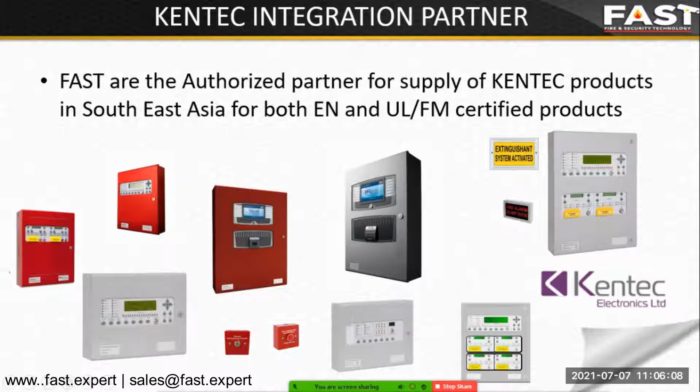And you can see some of the products there, some releasing panels, the Taktis panel, which is the up to 16 loop main fire control panel. Some smaller panels, some releasing panels, and some peripherals that are used, such as the LED signs, abort switches and maintenance switches. So we add value to these products. Quite recently we've had a few customers change from another type of panel. They like the Kentec panel, they like the Taktis panel.

At the moment we can't travel. If we could, we would go to the country, we would sit with the customer for a day, and they would be fully conversant with how that product works. At the moment, that doesn't happen. So over the last 12 months or so, we've been sending panels out and doing remote training, and that has proved to be very successful. As long as the panel is in the hands of the customer, we can link to the panel, use technology such as TeamViewer and even Zoom to control a PC on site, and go through the programming and the various setup routines for each individual panel.

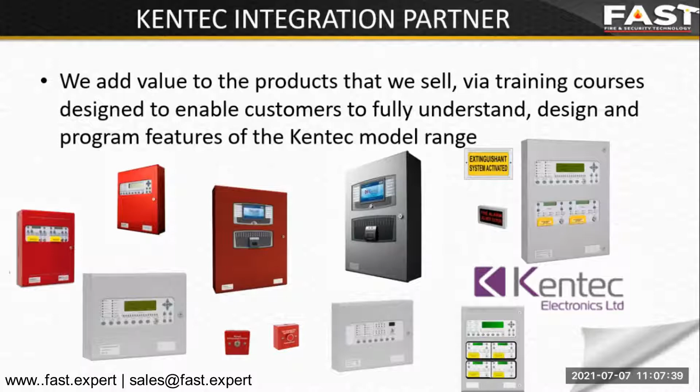Some panels don't need any setup. It's very simple. Conventional panels, generally, people work it out. But for addressable panels, especially the Taktis being a new panel, as long as you've got the software and an internet connection, not only can we train you on it, but we can support you when you get to site and you've forgotten what to do. You only need a mobile phone these days and a laptop, and we can log into your PC, have a look at what's going on, and you soon pick it up. So we add value to all these products.

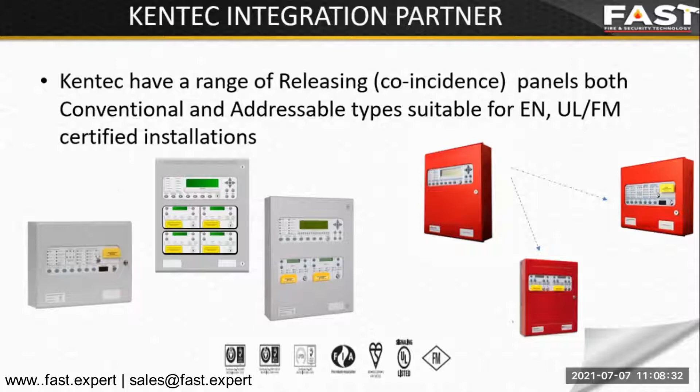Kentec have a huge range of releasing panels, or what's known as coincidence panels. We'll be taking a particular look at one of these today, where we're doing the integration to a small system and a large system using these releasing panels. So Kentec, one of our core businesses, we support it around the region, not only for new sales, but also for spare parts. Spare parts for existing models are quite easy, and for older models also quite easy, or there'll be an alternative part. Quite recently we've had customers phone up looking for a power supply that hasn't existed for 5 years. But liaising with the tech guys at Kentec, we offer one that's pretty much the same size and will replace the one that's gone faulty on site after many years of service.

Another integration partner is AF-X, which is an aerosol-based suppression system. We're the distribution channel for AF-X within Southeast Asia. From our base here in Singapore, it's very easy to service the Southeast Asia region. When travel does come back, and before the pandemic struck, I spend probably 3 weeks out of 5 traveling around to each country. So it's very easy to make contact with people, to show people firsthand what these products look like.

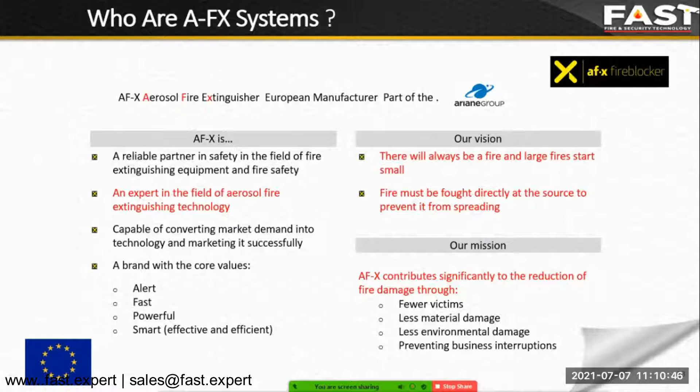When you send a rocket into space, there could be a fire when it's in orbit. So you can't send up pressurized gas cylinders because they become part of the problem. So if you go back 30, almost 40 years, you can see that a lot of these space agencies were looking at alternatives. And the alternative that AF-X developed is actually used by the Ariane group when they send up spaceships. It's pretty good.

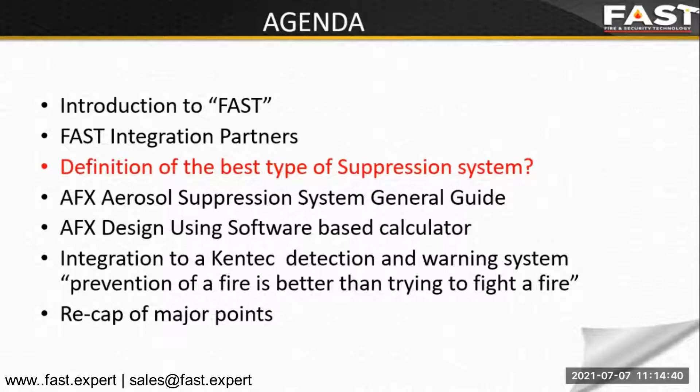People say to me, they phone up, what is the best type of suppression system, John? What would you recommend? And I guess it's a fair question, but it all depends on the application. What is the best type of suppression system? And suppression systems, detection, protection, prevention, they're all different terminologies. And very few people actually know what they mean.

A fire detection system, is that only to detect fire? Well, what's a fire protection system? We use these terms to generally cover some kind of fire system, some kind of fire alarm system. So what we do is we approach it slightly differently. We integrate systems together and we offer these systems to people. Even if they're phoning up and they're looking for a fire system, we sit with them and we say, okay, what are you actually trying to achieve? So what we try to achieve is protection of their business continuity.

And I would urge everybody on the call, when you sit down with a customer, they may be asking you for one of these systems, but you need to know what the implication of a fire in their premises is. Everyone will say, don't worry, we're insured. And that's a fair point. But the insurance industry actually have a little saying, which you'll find on various websites, some as high as 80%, some as low as 50%, but 70% of businesses that have a major fire event will cease trading within 12 months.

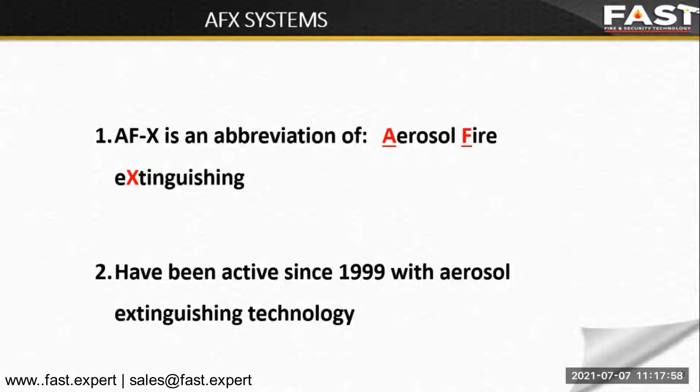So AF-X. It's just an acronym for aerosol fire extinguishing. They have been active since the end of the last century, since 1999. And it's been born out of the fact that, as I mentioned earlier on, when these rockets go into space, they can catch fire. There have been many incidences of fires, and you can't put them out with gas. Well, you could, but the gas itself, being a pressurized container in space, is actually a problem. So a lot of the products have actually been developed using technology that was based around the manufacturing and the launching of spaceships.

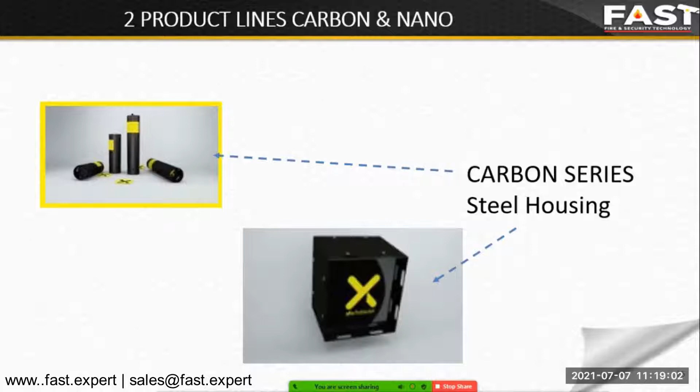So 2 product lines, quite simple: Carbon series and Nano series. Outwardly they look the same. One is made from steel housing, the other is made from stainless steel housing, which you'll understand as we go through. There is slightly more difference than that, but the housings just look slightly different. A black painted steel housing and a stainless steel housing.

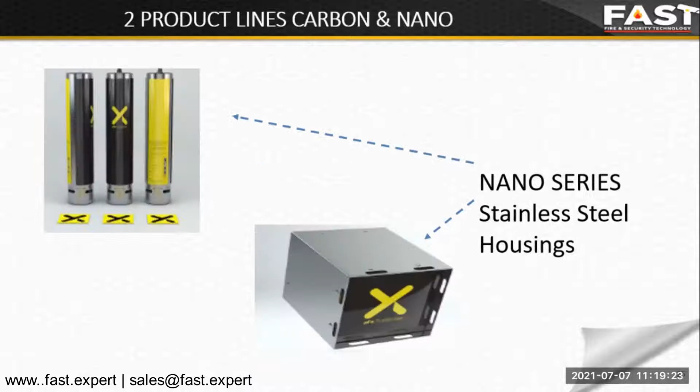And you can probably see one behind me on the bench there. So what's the difference? If you think of Carbon as being the general workhorse of AF-X, when it actually ignites, when it's actually triggered, microscopic aerosol particles are released into the room, and using convection, it is drawn to the seat of the fire. It interferes with the fire itself and puts the fire out.

It also coats the fire to stop it from reigniting, hence the name fire blocker. So not only does it put the fire out, but it will then prevent the fire from reigniting. So this is the general run-of-the-mill workhorse for pretty much the aerosol that we would design. It's great. The Nano is slightly different.

So Nano uses very small nano-type particles. And these particles make it ideal for tackling fires where you've got, let's say, lithium-ion battery storage, which is extremely hard to put out. Not only is it hard to extinguish, but it's hard to stop it reigniting. So that was designed and developed specifically for that type of application.

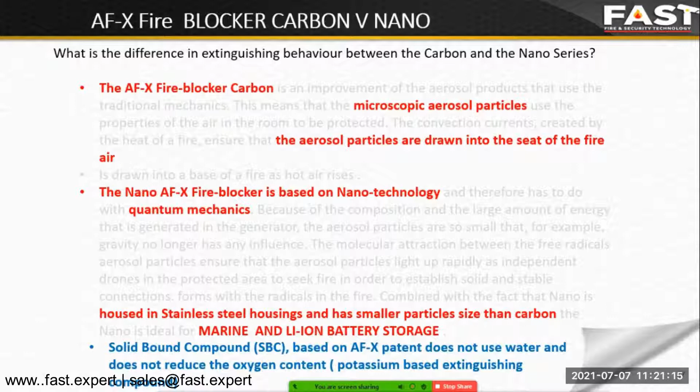As it's got a stainless steel housing, it's also suitable for offshore or marine type applications, or applications where there's a corrosive environment. So two different types of systems, both using what they call a solid bound compound. It has an AF-X patent on it, but it's actually a potassium-based extinguishing compound. No water, no reduction of oxygen content. So quite a nice technology to look at.

So what we've done as a distributor is we've looked at the shipping. A lot of these products come unstuck when you try to ship them to someone. So we've shipped the units from Europe to Singapore, no problem with that, and we've shipped them back out to countries within Southeast Asia. And what we found is that the Carbon series, which is the workhorse of most of our projects, is not classed as a dangerous good.

We have the manufacturer's data sheet. We've asked TNT and FedEx, how would you class these? And they said, don't worry, they're not DG. Great. The Nano is DG, as is the Stat-X and the FirePro and all the other competitors. So it just depends on your application. If your application is one of the 80% of applications that we come across, Carbon, no problem. Bring it in, standard shipping rates apply.

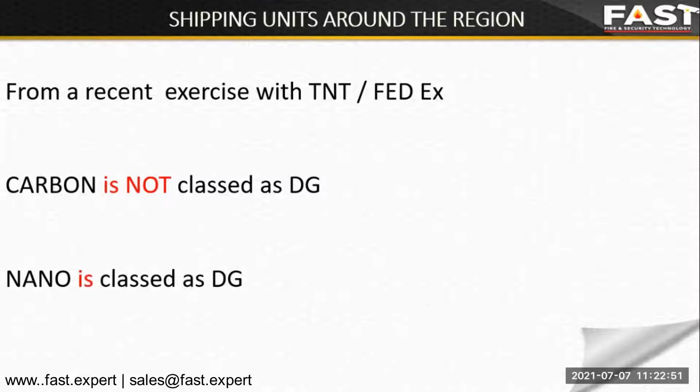There's no special import regulations required for it at all. So that's great. If it's Nano, then obviously there needs to be some kind of shipping company. And we found that there are named companies that will ship them in on your behalf. You pay for it, unfortunately. But you can get the Nano in if there's a specific application that you need. Probably for marine, maybe server type rooms, or lithium-ion battery stores.

So a lot of these systems, including AF-X, need to have some kind of calculator to be able to say what size, what model do I need, John, and how many do I need? So my answer is, I don't know. You've got to send me some information. So there are generally two types of systems. They're all electrically triggered. It doesn't matter whether it's a thermally detected device being thermally triggered, or an electrically triggered device. They're all electrical. It just depends how you design the system and what is the area being covered.

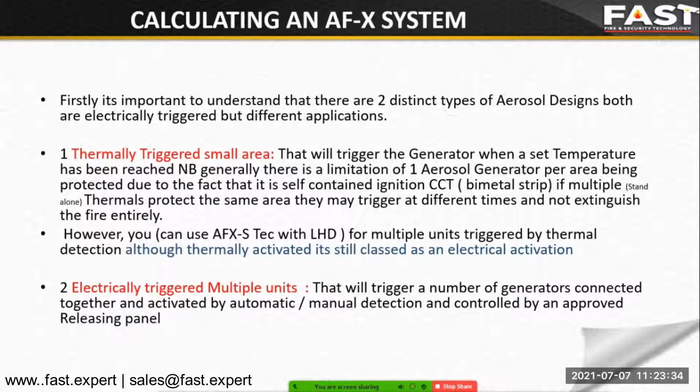So let's have a look at the components. Here's our components. There's some cylindrical units, there's some larger square units, and there's two different ranges. So I need to understand what is my job, what is the opportunity that I'm looking at. And there's a lot more components. There are brackets, stainless steel brackets, signs, which everyone forgets, but you do need signs.

All of the AF-X generators are very simple to connect. You connect to a connector hood. So if it's an electrical system, you wire into this from your control panel and you simply plug this into the generator. Simple. If you want to test the circuit, you simply unplug from the generator and plug in a test lamp. And you do your test and all these little lights light up to say it's working, no problem.

That's great. Each of the AF-X units has a specific resistance. And if that resistance goes up, it means there's something wrong with the generator. So it's pretty much a fail-safe type system.

On small systems where you might be protecting, say, a switch, we would use perhaps a bimetal activator. This little bimetal switch activator will plug. So this is just a plug, plugs into the top of the generator and sits in a cupboard, sits in a switch cabinet. Very, very simple. And it will activate when it reaches 65 degrees. So if it's switch cabinets, generally speaking, you need maybe 1 or maybe 2 units within that.

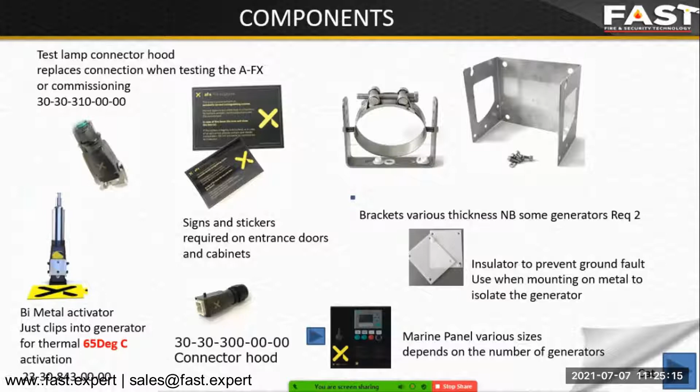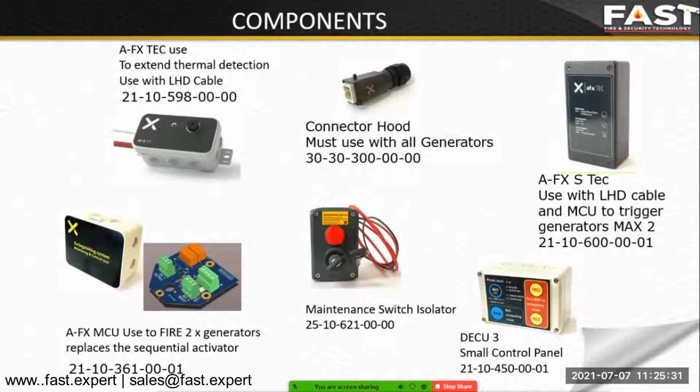Thermal activator is quite easy to use, quite easy to design, and works quite easy. So lots of components. There's even more components, some isolator switches, a few small panels allowing us to be able to connect up multiple thermal units using linear heat cable. So very, very simple. And if anybody wants more information on this, we have a complete presentation on AF-X.

Okay, so a customer's phoned up and he's got a switch room and he's got half a dozen switches in there, and he wants to protect the switches because the switches are running conveyor belts and lighting and all kinds of circuits within the building. So we need to know a little bit of information: what class of fire, the size of the area being protected, length, depth, height, and whether it's going to be a small area or large area, whether we're going to have one unit or multiple units linked together.

So we need to know what class of fire it is. So we're told that this is maybe a class A fire, so we can treat it as class A. The different classes are quite important, A, B, C, D. A and B, no issues with this. It's chemical fires, it's insulation burning, paper, wood, cloth, all those types of things. Class C would be an electrical equipment that has caught fire but is still energized. You cannot fight that fire using any aerosol.

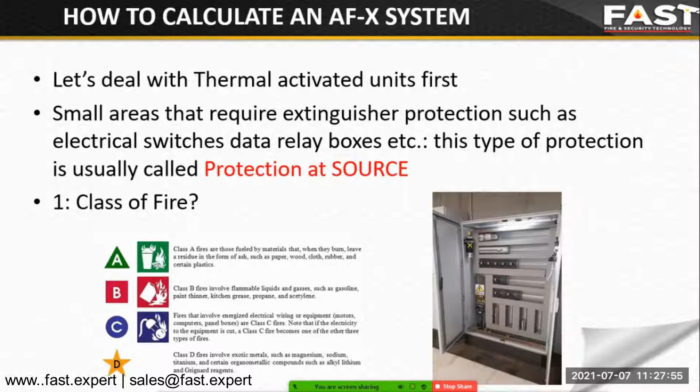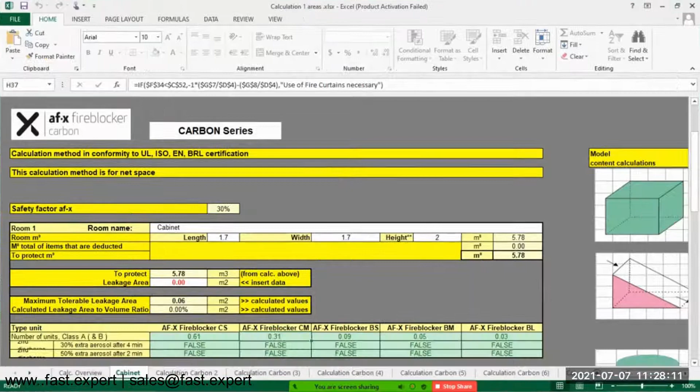So here's our very small example. So what have we got? We've got a cabinet. So we do have a little calculator, which I'll show you. Let's make it full screen. So I've got a calculator, and I filled in some information here prior to our meeting. This calculator can actually calculate 7 different areas, and you can run it as many times as you want. So if this was one area of 7 areas or on its own, it doesn't matter.

So I just put in a room name, cabinet, switch room, whatever it is. Length, width, and height of the room. And once I enter these dimensions, that's all I have to do. Now, what it will actually do is bring me up this little red bar down here. So under each of these fire blocker models, you can see the C, the cylindrical ones, and the other ones which are actually the large square unit. You can actually see some figures.

But don't forget, this is a cabinet. You can't put 2 fire blockers or 2 aerosols that are thermally triggered inside the same cabinet. The reason for that is one won't do the job. So what we do is one goes off because the thermal trigger says, I've reached my temperature. What it then does is it actually quenches the fire, brings the temperature down, and then stops extinguishing.

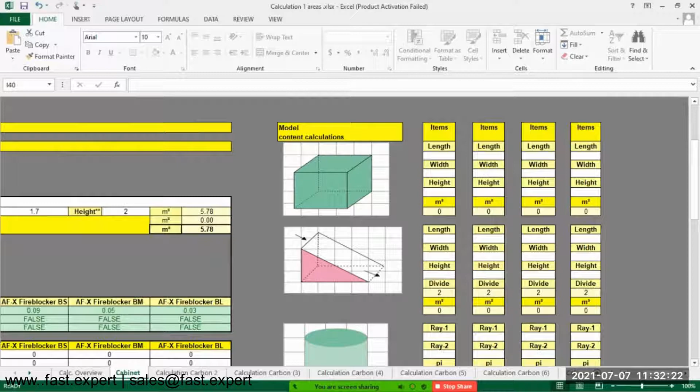Most areas that you're protecting are not actually empty. They've got something inside. So what we've got over on the right-hand side here is the ability to be able to put a shape in, maybe it's a small motor room on a boat. So the actual engine itself takes up some space. So we can actually put the size that the engine will take up in cubic meters into the calculation, which then will reduce the number of fire blockers we need.

So in the case of needing 1.36 fire blockers, I wonder how I can get away with using 1. Oh, there's a big engine in the middle. So I just put the size of the engine in, and that size of the engine is deducted from the space that I'm actually going to put the extinguishant in, and bingo, everything is okay. I can now use 1.

So the calculator is very flexible, and it does allow you to put in objects that are in the room and also leakage that could occur. And if it's leakage, then it will tell you, yes, you need to be able to put more, a bigger generator in, and you need to be able to put a secondary one in.

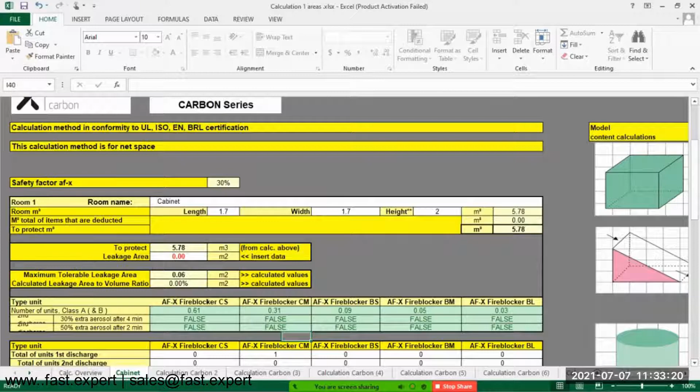So you might have a large fire blocker that initially goes off, and then you might need to top up the area after 3 or 4 minutes. So that would draw you to the fact that you need a control panel with a timer in it, i.e. a Kentec panel. Okay, so that's pretty simple.

What we can also do is produce a report, and the report just simply gives us a rundown on all the information that we put in. So we've calculated the best generator that we need. We can then select the equipment that we require. So in this small example, here's a generator, a couple of brackets, thermal trigger, clip it on top, a sign on the outside of the cabinet, which is a sticker, and a sign on the inside. That's just regulations.

Not only can we put this together in a few minutes, but you actually don't need to drill the cabinet because we supply a magnet on the back. So you assemble this on the bench, attach it to the bracket, and stick it in using the magnets. How simple could that be?

That generally is a simple one-to-one small cabinet, small area with one thermally triggered device in it. But not all systems are like that. This one is, and works very well. So that's great, no problems at all.

With all aerosols, it's important to understand that you need to extract or clean up the area after it's discharged. Generally speaking, it will discharge and fill this area. It will put the fire out if there was one there, and block the fire from starting for a 10-minute period. You've got literally 50 minutes to get all of these airborne particles, which look like smoke, out of that area.

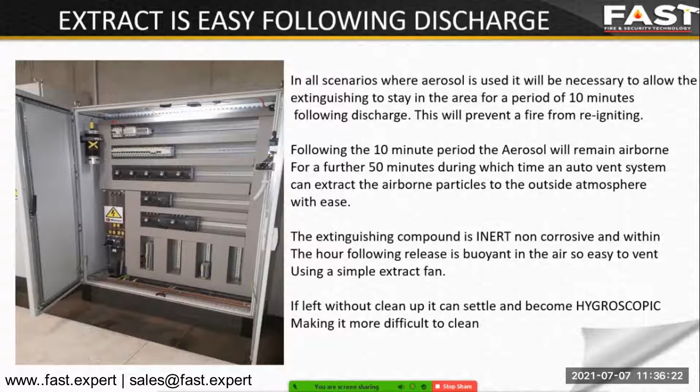Just a warning that we design systems - we even design the size of fan that you need. Very simple, very easy to install.

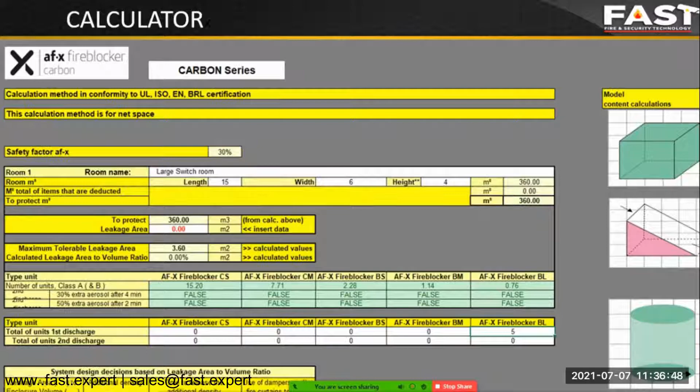Let's look at a large switch room - total flooding, 15 by 6 by 4 meters high. I won't run the calculator, but it looks like this: 15 by 6 by 4, and it's telling me I need 5 of the large fire blockers. So now I've got a large system in here, and I'll have just 0.76 over, so that's good. It doesn't really matter, a bit can leak out.

So that's good - here's my equipment, my carbon fire blocker, BL fire blocker. And obviously we need now an electrical option, so we need some panels, some detection, et cetera. Let's have a look how that would look as a system.

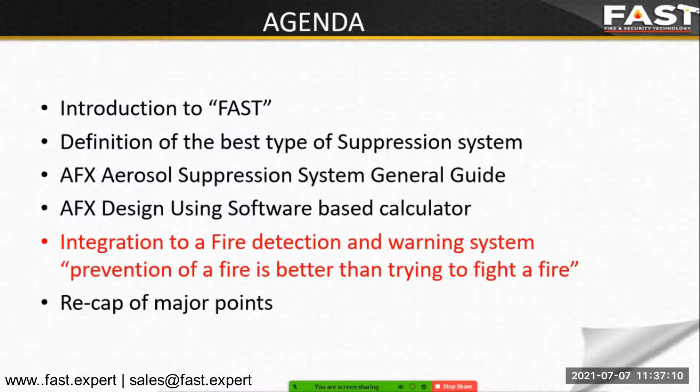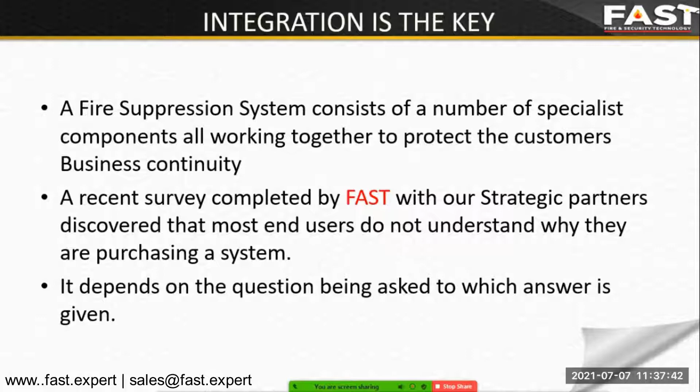By integrating that into a full system using detection, using a releasing panel, using warning devices, we'll see what that actually looks like. We actually ask customers, end users, system integrators and solution providers what is it you're trying to do. It might seem obvious - we want to protect this, we want to make sure there's no fire - but they're not actually precise in what they're asking. A lot of questions actually seem the same.

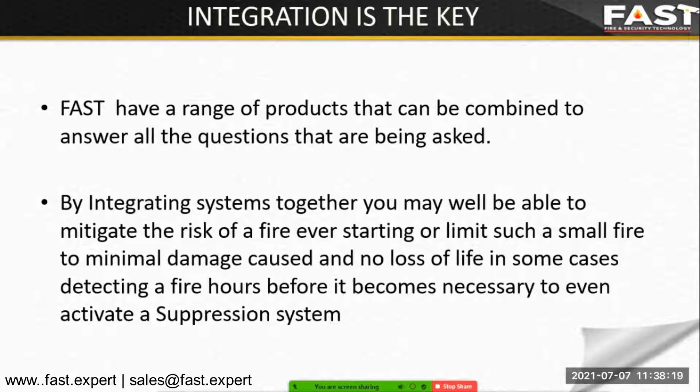Do you want to detect a fire? Well, of course we do. We want to protect our employees, but it all depends on what question you ask people. If you actually say to someone, do you want to prevent a fire, they'll say yes to that. If you say, do you want to extinguish the fire if it occurs, yes, that's what I want too. So it all depends what question you actually ask a customer. I guess the question we should be asking is: do you want to prevent a fire? By integrating the products you saw earlier on, we can actually do that.

So let's have a look at the standard scenario. The standard scenario would be the panel. Here's our Kentec panel, some LED signs - I'm sure everyone's aware of what these are. Bells, inside and outside sounders, beacons - these are all to give you different stages of alarms.

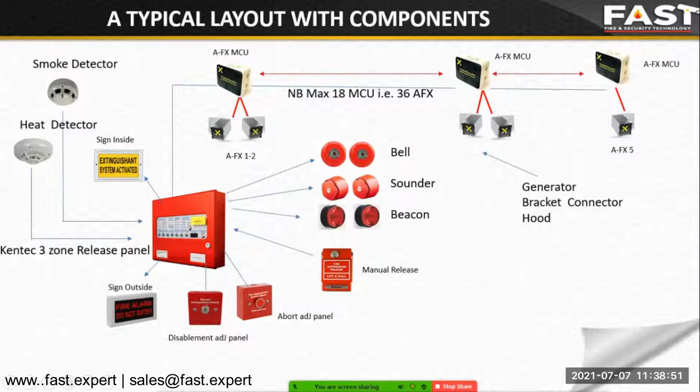Here is our trigger for the AF-X. So the AF-X is there, you can see the 5 units, and usually 2 different types of detectors. Quite often I go to sites and there's 2 smoke detectors - okay, that's fine. So it all depends on what question you ask.

So let's assume the customer has said, I want all those things, John. I want you to give me everything, yeah? I want to try and prevent the fire. I want to extinguish it if it does happen. And obviously I want to detect it and protect it. They actually want to protect their business continuity - that's actually what they want to do.

So here's a scenario I've seen fairly recently. The site is unmanned. It's got a basement switch room, and the basement switch room is a bit of a mess, to be honest with you. I don't know why, but switch rooms tend to get very messy. And that switch room is running the entire manufacturing plant, so that's critical to the customer's business, because if the switch room is out of action, so is the rest of the plant. So the customer said yes to all our questions.

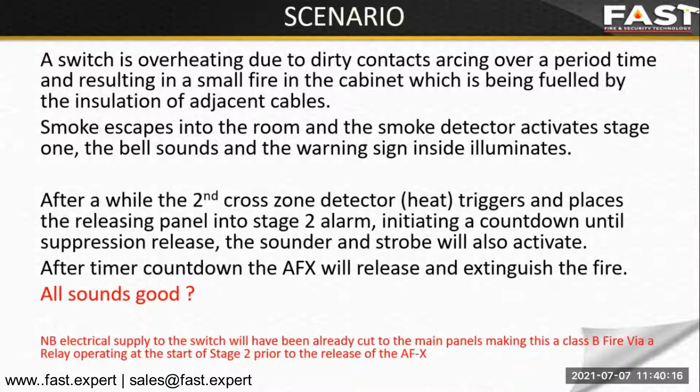So in our first scenario, where we've got bells and sounders and a couple of detectors, the switch overheats, smoke escapes into the room, the smoke detector activates, stage 1 goes off, the bell sounds, the warning signs start to illuminate. After a while, the second detector goes off, placing the releasing panel into second stage alarm, initiates the countdown, and the AF-X releases. Great, no problem at all. Okay, so that's the typical type of scenario that is expected and happens on site.

Okay, so let's have a look. Do you want to detect the fire? Well, we did. Do you want to protect the employees? Well, I guess we did, yeah. And we can extinguish the fire, yeah. We didn't prevent the fire from happening, and it's arguable whether we minimize the damage caused by the fire.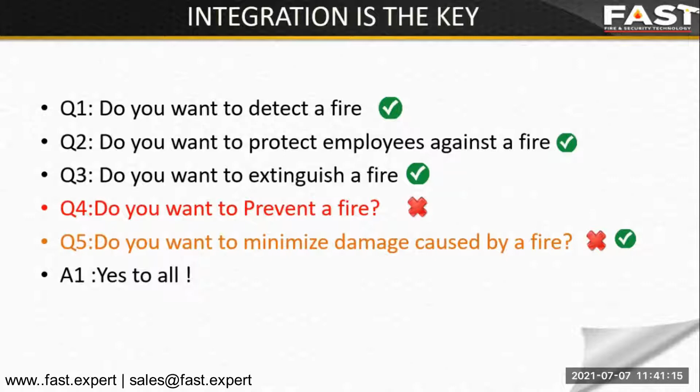A small fire can put that customer out of action for 2-3 weeks. Yes, it's a switch - the switch is irrelevant, it's a few hundred dollars worth of switch. But some of the downtime figures that customers quote to me run into tens of thousands, if not hundreds of thousands of dollars an hour, because they can't produce the product that they're producing. One example given to me some time ago was the downtime for a production line in Thailand making Ford trucks - $5 million an hour. And that $5 million an hour can be because a switch was burnt out unexpectedly that ran a production line and stopped it.

So just looking at those there, we've probably got a couple of crosses and some ticks. Okay, that's reasonable - is that all we can expect? No, we can do so much better, we really can. And I'll show you how, I really can.

Not only can we do so much better, but I recently attended a commissioning of exactly that type of project, and the system integrator was handing the system over to the client. This is exactly what he said: okay, so when the bell sounds, you're in stage 1 - this means you've got to investigate and see what detector zone is activated. And then if you get a sounder and a strobe and a bell, you should leave the building.

No one's going to remember that. They're not going to remember it. They won't even remember - they'll hear a bell, think it's a fire alarm, and leave the premises. So I think it's very confusing, and nobody understands. They're sitting there when everything goes off because they don't understand what phase of the fire they're actually in.

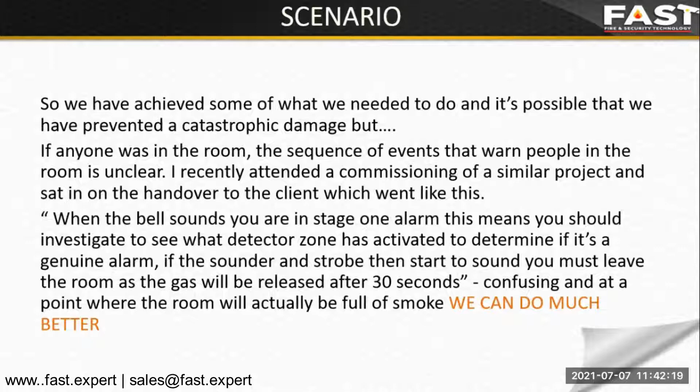So now our little schematic looks slightly different. Yes, our Kentec panel here - this panel, we're selling 400 or 500 of these a year. It's very, very popular. It needs absolutely no installation training - we'll give it to you, but it's very simple. It's a conventional panel. There are addressable panels and there are multi-zone panels, but for our little scenario, single zone, single area, multi-zone panel. And we've still got our smoke detector.

But what I've added in now is I've added in Fire Cryer. Well, those look nice. They have got strobes on the front of them. And I've added in an ASD, an aspirating smoke detection system, our Vesda. So that's even better. Not only have I added the Vesda in, but I've actually added in a GSM communicator. This will work anywhere. GSM, SMS communicator works in any region. You just put a SIM card in and it works. So we can actually integrate this system in a couple of minutes into a GSM communicator. So very, very simple to do.

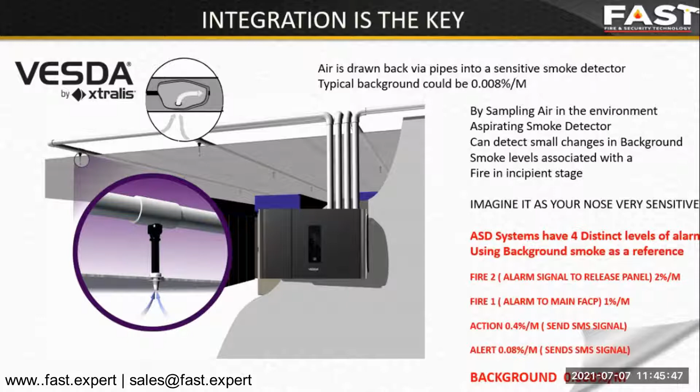So what we can do with Vesda is we can say, right, the normal background is 0.008 or whatever it is. 10 times above there, we will actually have a relay that clicks over and says the smoke level has risen 10 times. 5 times above that, we'll have another signal to say that it's risen a little bit more. None of these signals are actually a fire, but they could be a fire starting, okay? So we'll integrate that into our project.

And you can actually see here, this is where Vesda works. Here's our alert signal. When the smoke level has risen 10 times, 11 times, 12 times, whatever you want to set it as, above the normal operating background level of smoke, it will send an alert to the security guard, the maintenance manager, the owner, and anyone else. Multiple SMS go out. And what it does is it brings people into this room. So you're bringing people to an area where in a few minutes, a few hours, or even a few days, you could end up with this scenario. If you don't, you'll just get to this scenario later on.

So hang on a second, we can actually send somebody there the day before the fire occurs? Yes, you can. Has it ever happened? Yes, it has. In fact, that's what Vesda is for. Most people only ever link up Fire 1 on Vesda. This is pointless. You're missing the point with Vesda. You're missing the point with an aspirating system. This is what it's designed to do.

I go in there, I use my Vesda, my nose. What's that burning? I don't know. I'm the security guard. I'm just told to come down here and take a look. So I'm having a look. I better call someone in. So at that point, you're bringing experts to an area that can say, yeah, you're right, I can smell something. You can use a thermal thermometer. Every switch in a switch room has an operating temperature. It doesn't vary. It's always the same.

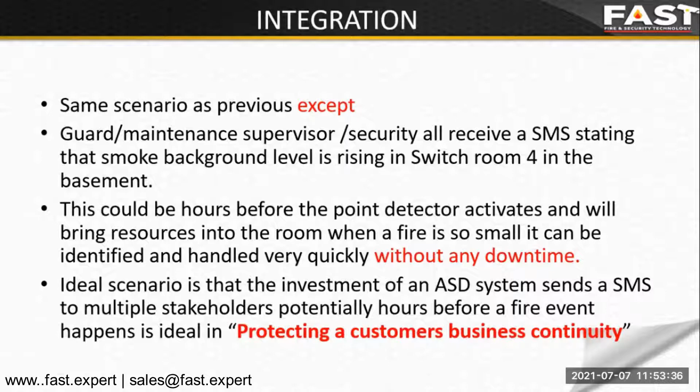And what you're doing now with the addition of a few little devices is making it easier if the alarm does go off, but you're actually getting to a point where the alarm will actually not go off. There's no bells ringing, just an SMS bleeping on your phone. So you're actually protecting the customer's business continuity.

Let's assume nobody responds, or they respond and can't find anything. Let's leave it. It doesn't matter. It's okay. We're so early in the fire cycle that we'll just leave it, yeah? Because when VESDA reaches action, we can send a more urgent message to the smart device or the mobile phone. Please go and check. Go down there and now check it, yeah?

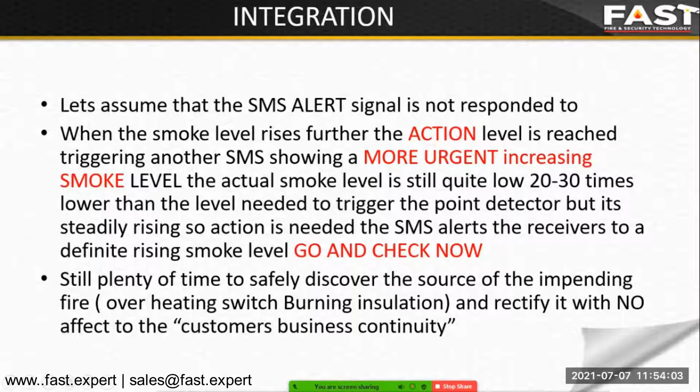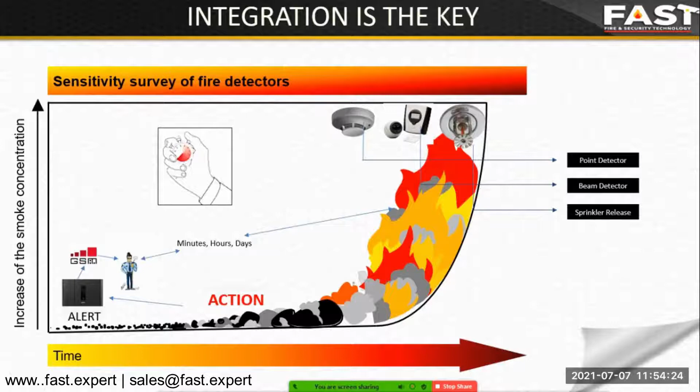And here you can see action. So this is 10 times above the background. This could be 5 times above alert. And we're still hours before we get to this bit where the fire is actually going to occur. That's okay. That's a good scenario, yeah? So now when we go in and we use our inbuilt VESDA nose, we can smell something. And we do now take it seriously, yeah?

So that's good. If it's a totally unmanned site and nobody's reached there in time, then of course, VESDA will reach fire 2. Shortly afterwards, the point detector will activate, or the heat detector, or whatever second zone you have. And what it will actually do is release the extinguishant into the room and put the fire out, yeah? But that's not what we're trying to achieve. We're trying to achieve a point where that doesn't happen, yeah?

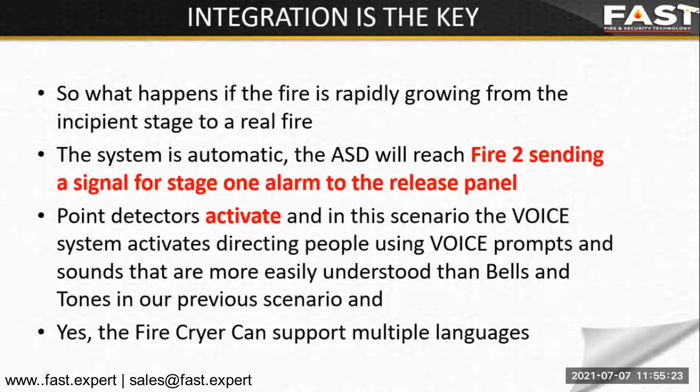So a lot of people say, can we use different languages for Fire Cryer? Yes, you can. So we can record any message. There are limits to the message; you don't want a 20-second long message. So it's generally kept to a short thing. And generally speaking, it's in dual language, so it's in the language of the country plus English. Or it could be just in the language of the country or just English.

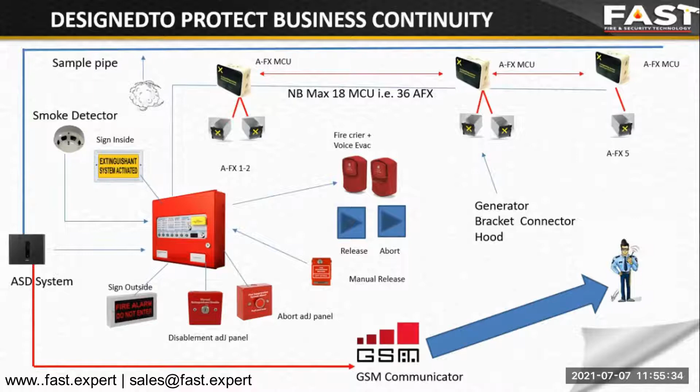Okay, so that's good. This design here is designed to protect the business continuity of the customer so that we can tick that last box. We've said everything. We can do it all. We can even, if the customer wants it, integrate into a CCTV camera and send you an email, not just an SMS. We can send an SMS, an email, and even a CCTV picture so you can actually see what's happening in the room, and all you'll see is a little bit of background smoke that's triggered the VESDA, if that. So we can do that integration.

And this guard here can actually just say, oh, I see. And he can actually see on his smartphone within a few seconds of that VESDA telling him: VESDA basement 4, here's the alert, I can have a look. Okay, I better get down there. There's no fire at the moment, great. So we can go down there and follow the procedure that the customer has in place.

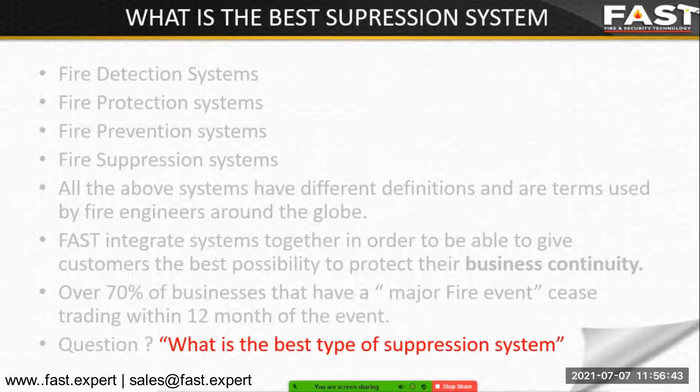Okay, so I'm going to return to my little screen earlier on of what is the best type of suppression system. And you'll all know the answer to this. It's one that never actually needs to be used. So we put all these systems in, and there's a system after the suppression system, which is called insurance, yeah?

But we spoke about insurance at the beginning. Insurance is fine, I've got all my stock. I've got my $1 million worth of stock that was paid 6 months later than the fire. Now I've got the money, I can rebuild another warehouse.

But by the time your warehouse or your production facility is up and running, your business is gone because all your customers have moved on. Same for us, you know, we've got a warehouse full of equipment. Yeah, it's protected by VESDA. It links to me. I can come and actually have a look, and I can alert the building security to come in and have a look.

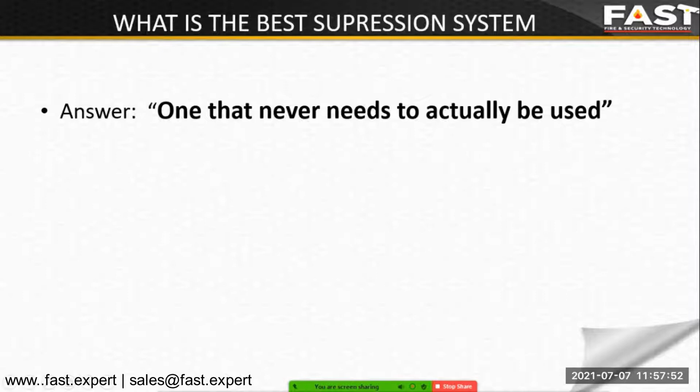But if we lost it, we'd be struggling because our products are there. We can't get products tomorrow. The insurance will pay up, but probably 4 or 5 months down the line. So yes, it's a little bit of a flippant answer, but the answer of what the best suppression system is, is one that never actually needs to be used. There's a little video here showing you how effective.

So I think you'll agree that was very effective. A few seconds, the fire's out, it will not rekindle and can be vented very easily. There are hundreds of applications, there really are. There's not one size fits all, not one product can do everything. So aerosol is usually the smaller switchgear type applications, the marine applications, the lithium ion battery storage applications, the small switch rooms, that's fine for aerosol.

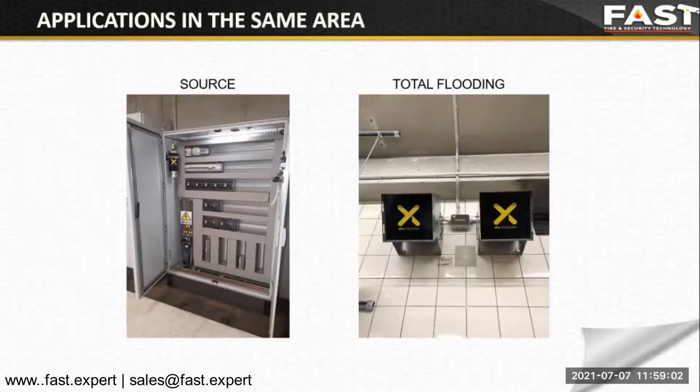Clean agent gases are usually more suitable for critical server applications. But probably maybe 60 or 70% of the market is suitable for different applications. So either it's source or total flooding, or both in the same area, that's okay. You can see there's many applications, cable tunnels, passenger tunnels, car tunnels, all areas where AF-X can be used.

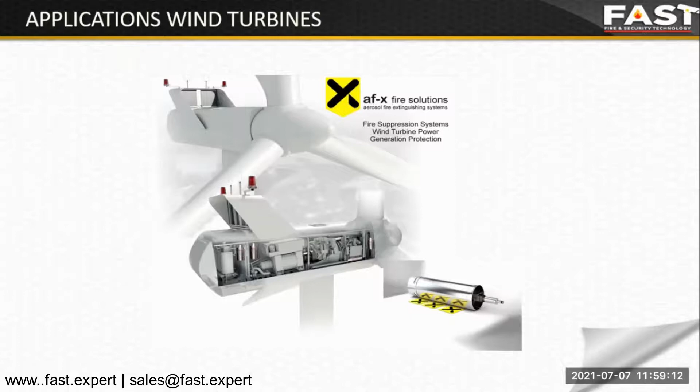This is one extremely well-used application. There's two areas within the wind generator. At the top, which is the generation part, and at the bottom, which is the switchgear part. So they all need to be protected by aerosol. You're probably not going to put a gas system in. It's a very, very small area.

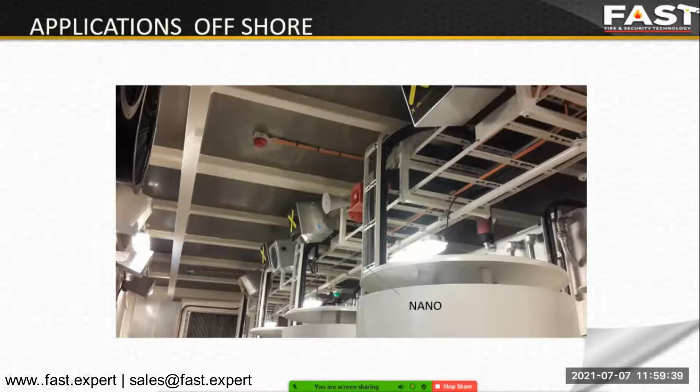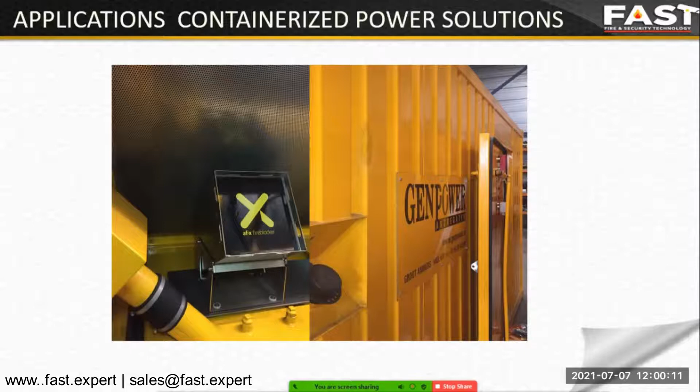Offshore applications, no problem. We're probably going to use nano because of the corrosive components in sea air. Storage and warehousing, that's great. Even document stores, very easy to protect. This is one that is exceptionally being used at the moment. There is a shortage of power generation in most countries. So where a customer is expanding their business, they're probably going to bring in something like a genset, which is a 40-foot container with a generator in. And that generator needs to be protected because it becomes a key part of the customer's infrastructure.

And marine vessels, people always ask me, do you have IMO certification? No, we don't. At the moment, AF-X does not have IMO certification, but IMO certification is only for vessels that are over 24 meters. So leisure craft, engine room compartment, you don't need IMO certification. So we don't have it yet. And there is a new UL certification for aerosols on vessels coming out in the next 6 to 8 months. So then AF-X will apply for that because it's specifically for marine vessels.

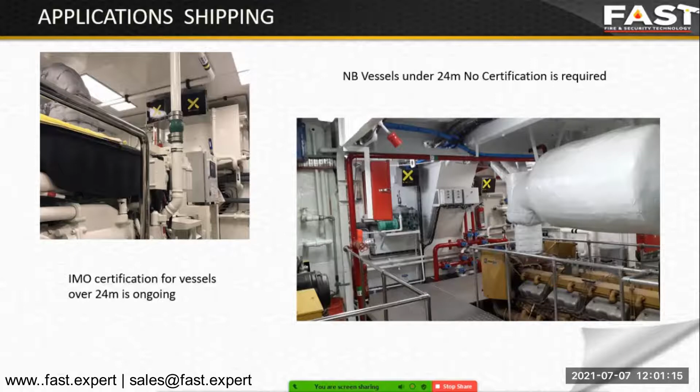So we can do marine vessels, and if it's under 24 meters, no certification. And if it's in a very small area, under 68 square meters, then you don't need it anyhow. So there's a lot of little regulations there where you don't need it, okay? So again, our summary is integration is the key. This is what you should be fitting. These are all very easy to fit, very cost effective, they really are. So we're here to help you design these. We're here to show you exactly what components you actually do need.

All of the aerosols work the same. They all need some sequential switcher. A-FX just happen to manufacture their own. Hochiki manufacture one. So it depends on what you're fitting.

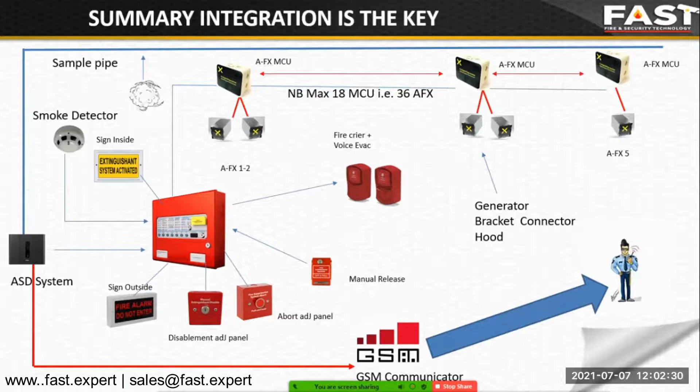It depends on what you actually install, yeah. Okay, so with the addition of a few integrated components into a standard releasing system, you've got the best possible chance of preventing a fire from ever occurring, yeah? And the cost is marginally above what it would cost to install the standard system anyhow.

And when people actually say to me, well, what's the cost? Listen, the cost of a fire is going to be greater. So the cost of putting this system in is far, far less than actually having a fire in the first place. I know it's a strange answer, but it's true, yeah? So I think in retrospect now, you need to just have a look at those.

I will make this presentation available for you to download. So I've recorded it. And I think we can leave it on that note, that whatever the cost, it's cheaper than a fire. Yeah? So thanks for listening.